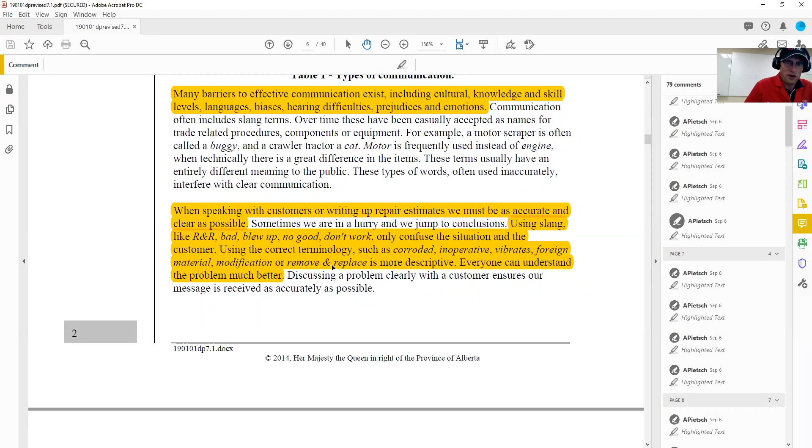When we're communicating, you have to know your audience. Now if you were going to go to a customer, I would probably say, well, I measured the brake drum and compared it to new specifications, and it's worn beyond service, rather than saying it don't work, okay? Slang over using the correct terminology is much more professional. But yet again, know your audience too. If you're on a good relationship with your service manager and you're just talking about this trailer that blew up, that's fine, okay?

This is a good example here. You don't want to be doing this in front of customers, okay? It just shows unprofessionalism, and they might regret bringing their unit to you, okay?

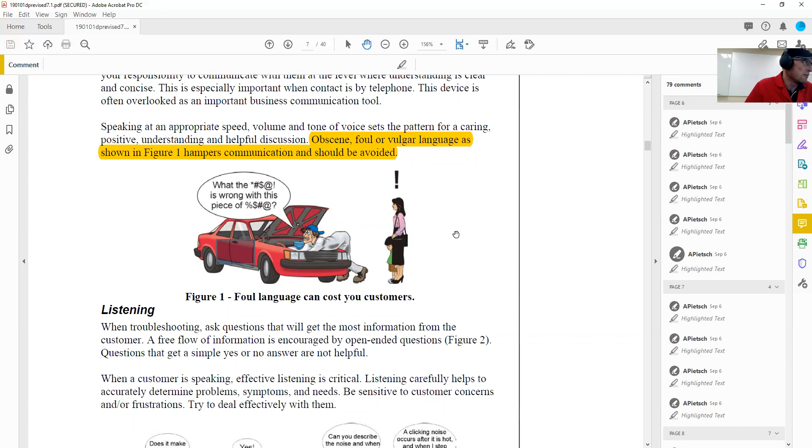Another thing that I've seen in private shops, there's going to be a name on the door here, you know, whatever the transportation, blah-de-blah transportation company. Well, if you're this technician here and you're saying, man, this company always has the biggest junk and I hate working on it, it's a piece of crap, then the driver's right here, it's probably going to get back to his company. And who knows, maybe this company has 2 units, not the end of the world, but maybe you had a contract with this company to service all 1,000 of their power units and 1,000 of their trailers. And now this gets back to the service manager over at the other place. Well, you know what, we used to like them, but not if they're going to treat us like that. So we're going to send our equipment somewhere else. Okay.

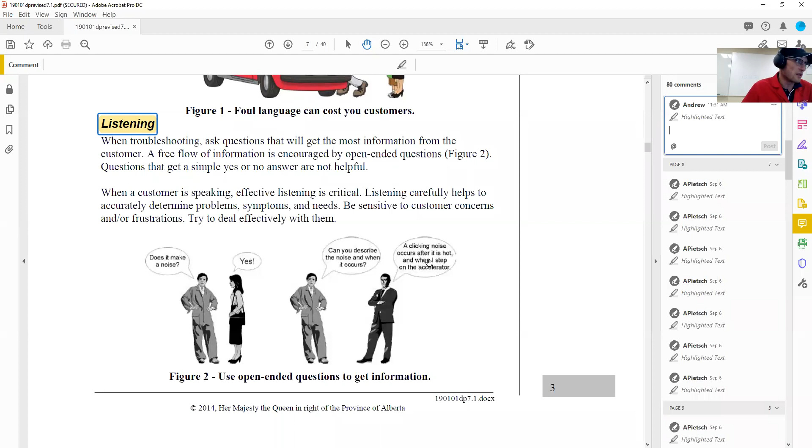Does it make a noise? Yeah. Can you describe what it is? A clicking noise that occurs after it's hot and when I step on the accelerator. All right, where does the clicking noise happen? There's lots of other things, so really pay attention and listen for those answers, okay?

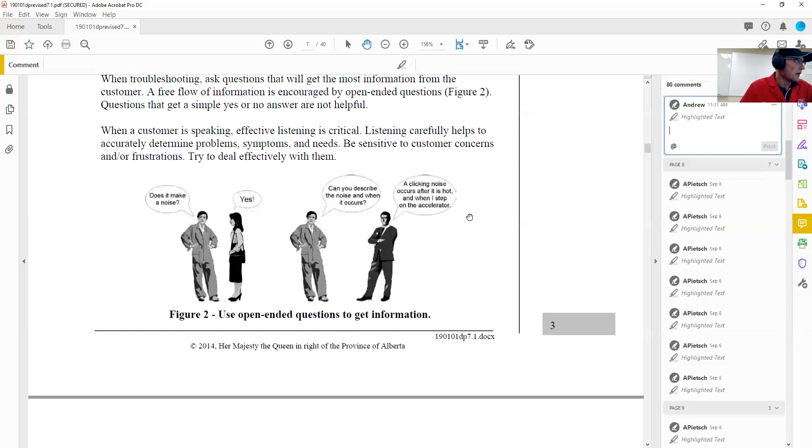Sometimes, in a situation like this, you could have your customer saying, hey, you know what? They could be telling you in not so many words, hey, when I really overload the heck out of this thing, it starts to break. And then that's the point where you can say, maybe you shouldn't operate it like that because that's beyond its specifications, okay?

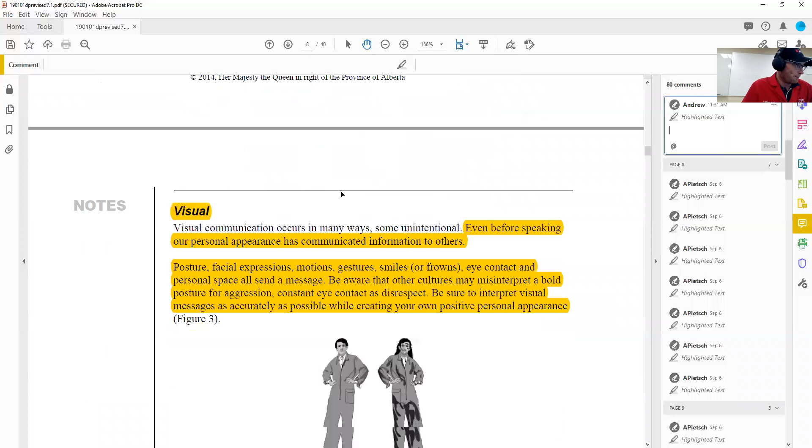Visual. As much as it seems difficult, you want to be a clean technician looking professional rather than this one. Now for our trade, sometimes it's okay, and I want to say that nowadays biases are going away because of visual, how you look visually, but it still does play a factor.

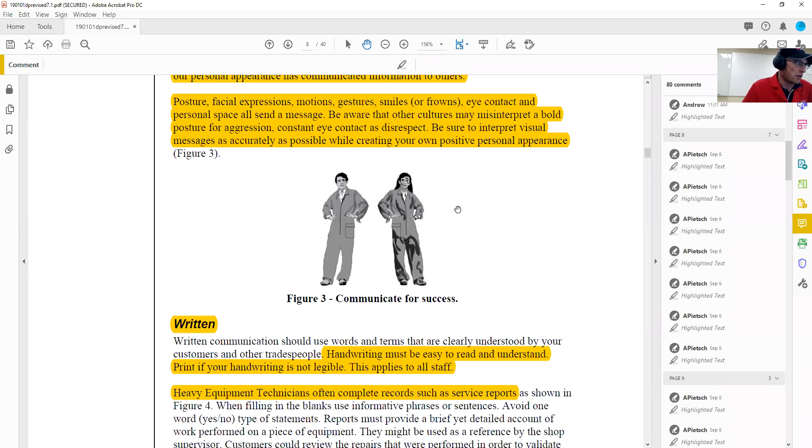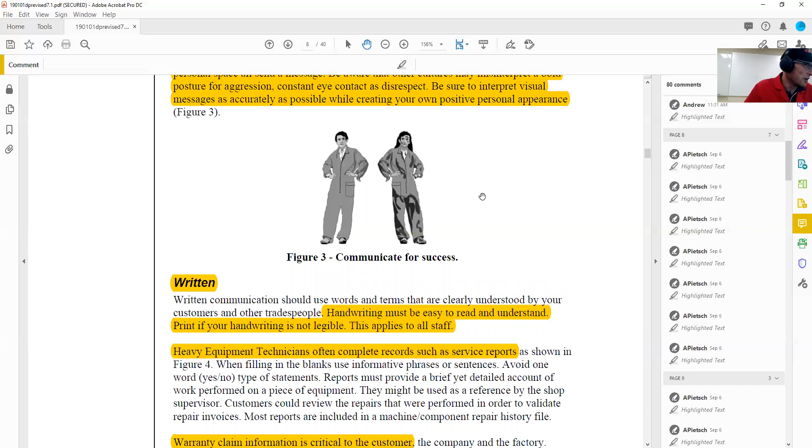And that's talking about things like dirty coveralls, dirty clothes, smelling bad, your hair hasn't been, like, sure, have long hair, but at least maybe brush it, put it in a ponytail. If you have long hair like this, I don't know why you'd want it like that. If any of you have had long hair and got it caught in a creeper wheel, you'd much rather have a haircut like that, or keep your hair up under your hat like I would do, because it sucks to get it caught in things.

Written is very, very important. Must be easy to read and understand. Print if your handwriting isn't legible.

We need to complete records such as service reports and warranty claim information. They're both very crucial. One thing all of you are going to start getting involved in, or most of you probably, is CVIPs. That work order that you're filling out a story on for a CVIP could end up being read into evidence in a court.

So you don't want to have that time where you wrote on that service report that his stuff was real messed up and it was all broke so I changed it. You're going to want to write on there that brakes were worn beyond the specifications to this number, replaced with new. Brakes weren't functional because of this problem, repaired, brakes function correctly.

You don't want to have to sit in a witness box and try to justify why, I don't know, you drew a bunch of doodles of happy face stick men on the service report. That would not be a fun thing to do.

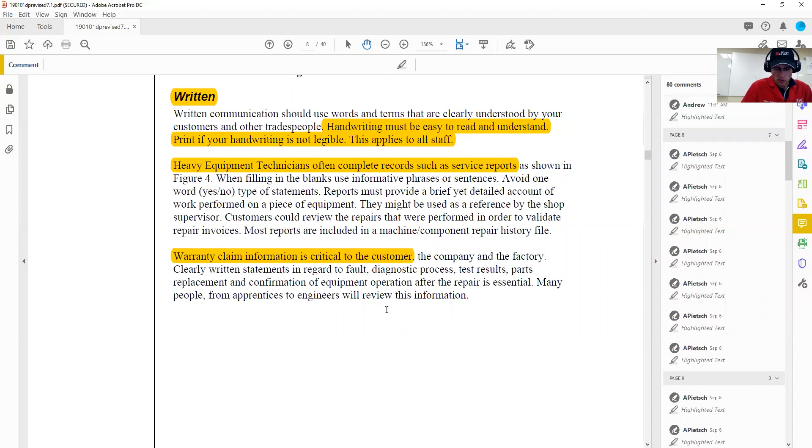The other thing is when it comes to warranty claim information, there's lots of money on the line when it comes to warranty, and you personally could cause the warranty to be rejected because of how you keep track of all the information. So your written language can determine that.

Picture of a service report. Some of you may have seen things like this, a complaint section or a guideline on questions to ask operators about how things are happening, or this might be something the service writer would ask before you ever see the unit. And then when your work order comes in, this is all going to be on it, so you have a little more information.

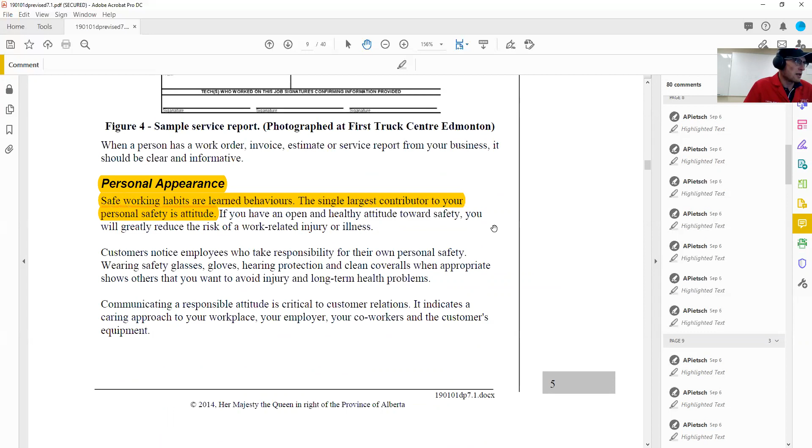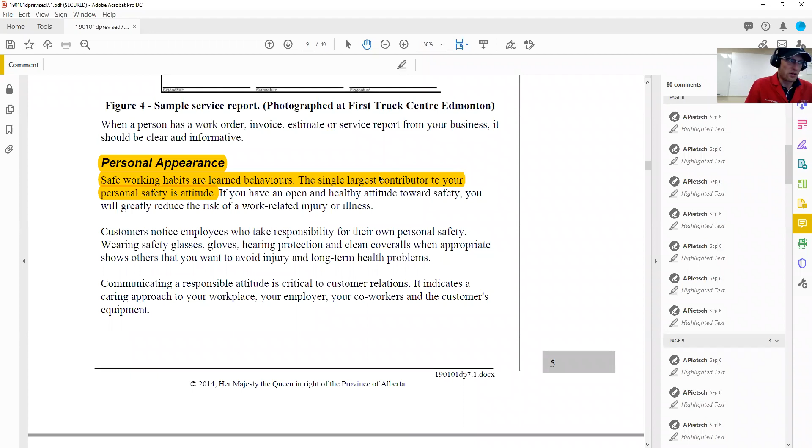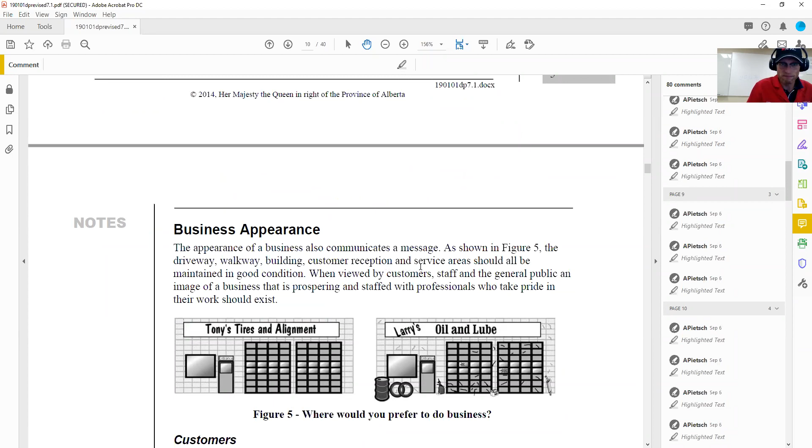So it says personal appearance, but that's not what I want to talk about. I want to talk about safe working habits are learned behaviors. Remember I said you're your own biggest advocate, so your attitude is the biggest contributor to safety. If you feel like, I don't have to do that, screw it, that's not a good attitude. Your attitude has to be, to keep everybody safe all the time, I need to wear my safety glasses all the time, so I wear them all the time. That's a good attitude to have.

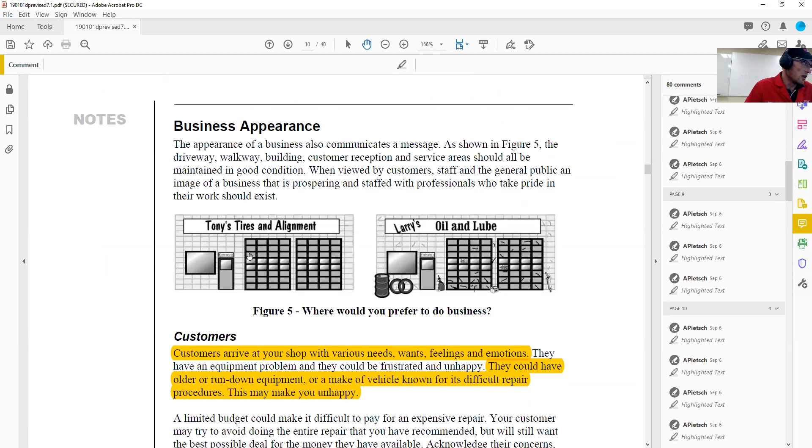Business appearance is another thing. You would probably want to go to Tony's over Larry's, just because Tony's place looks a lot nicer. They've got it cleaned up and taken care of.

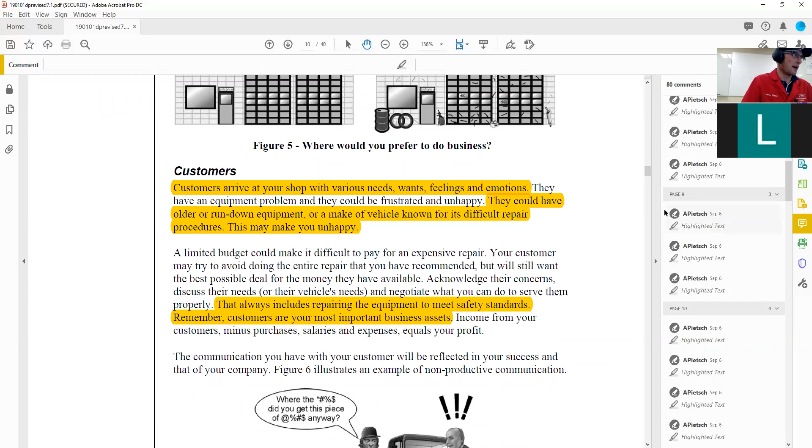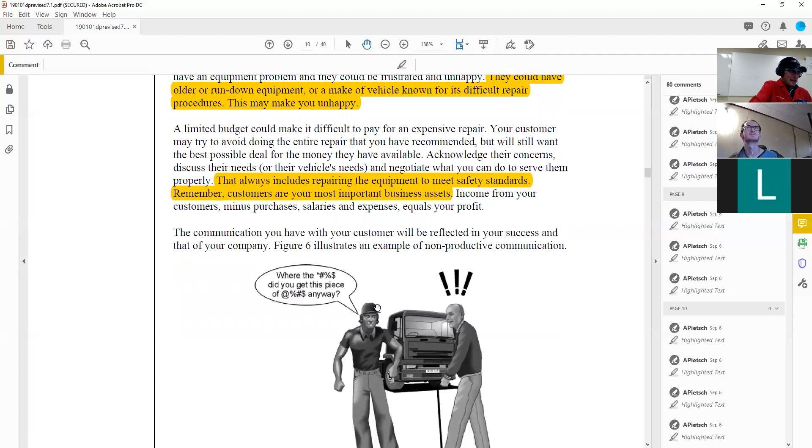So the customers, just because they have old stuff doesn't mean you should put them down. Like I said, where'd you get this piece of crap anyway? Who cares? He's your customer, he's paying your bills, okay.

It just means more work for you. Oh, it does, but I mean, you get paid by the hour. Typically.

And that's where good communication comes in. Hey, Mr. Customer, this unit hasn't been maintained in a long time. If it needs a lot of work done, our estimate's going to be pretty high. So it's a work between you, the service writer, and the customer. I mean, yeah, there might be a lot of work, it might be a pain in the butt, but it's the name of the game if you're a mechanic. Right? Being a technician is a certain kind of work.

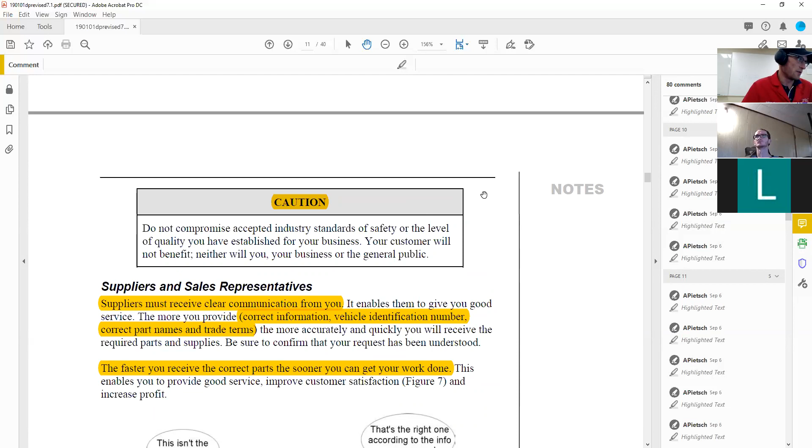And like I said, most of us get paid by the hour. I haven't met anyone piece rate out there, have you? Like you get paid by the job, a certain amount? Isn't that like a dealership thing? Even heavy duty dealerships don't do that, they pay people by the hour. But car dealerships, if anyone was an automotive mechanic, that would be like that. Lots of places do that.

So what that means is, according to the book - and there is book time on heavy equipment, that's how they bill or make estimates, based on these book times. For instance, let's say it takes an hour to change brakes on a Honda. Well, Honda is going to give you a job, you're doing brakes for your first job, we're going to pay you an hour - whether it takes you 5 hours or half an hour, that's how they pay. As far as I've seen, I haven't met anyone in heavy duty who's getting paid like that. For us in heavy duty, it would be, we're going to do brakes, brakes generally take an hour, here is your estimate for an hour.

Our technician also found that your unit is especially worn and hasn't been maintained properly, so we're going to add extra time for each rusted lug nut. There is a book time, an additional 10 minutes for each rusted lug nut, or 5 minutes, so you add that time on. There's additional time for a drum that's seized onto the hub that you would add on as well. So that's how they bill for the time that you used. Okay, does that sort of make sense?

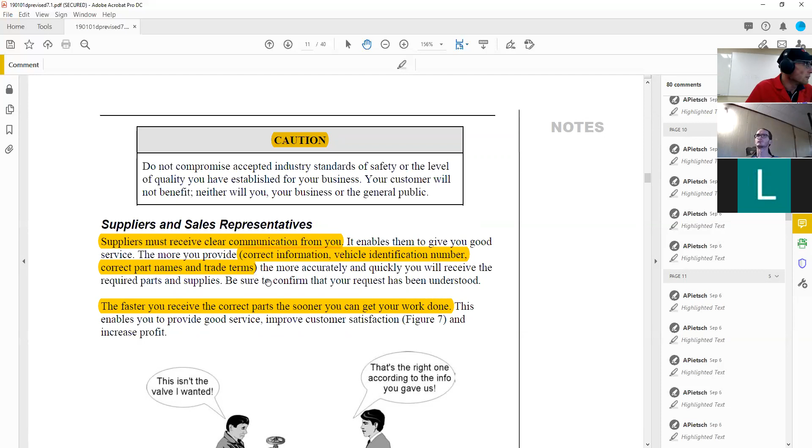Now, suppliers' representatives - who has ever gone to the parts counter and got the wrong thing? Once? Or lots? All the time. The blame can be shared 50-50 in my case. I agree, sometimes it isn't necessarily just their fault - it's your fault, sometimes it's their fault, sometimes it's no one's fault. It can be a bit of a process. Good communication is probably the best way to try and eliminate that, but still, even with the best communication in the world, you could end up with the wrong parts.

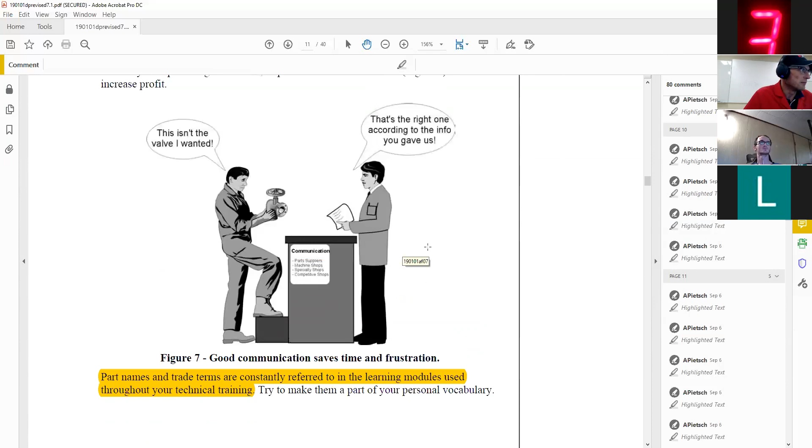This is how part names and trade terms are very good to use. If you go and ask this guy - I'm trying to think of something, I can't even think of a part right now that has a couple of good different names to it. So, as a tradesperson, you should hold yourself to specific standards.

We are all going to be journeymen. We want to be not looked at as the bottom of the barrel deplorables or just blue collar workers. We want to be treated with respect and professionally.

Every time you drive down the road, take a look at those tractor trailers out there with the blue stickers on them. Somebody like you or I is making sure that those are safe. We want them to be professional, clean, have a good understanding of what they're doing, be honest, not cutting corners.

Something else to do to be professional, don't badmouth businesses. Never, even if they're your competitor. You don't want to be the business that has to put everybody else down.

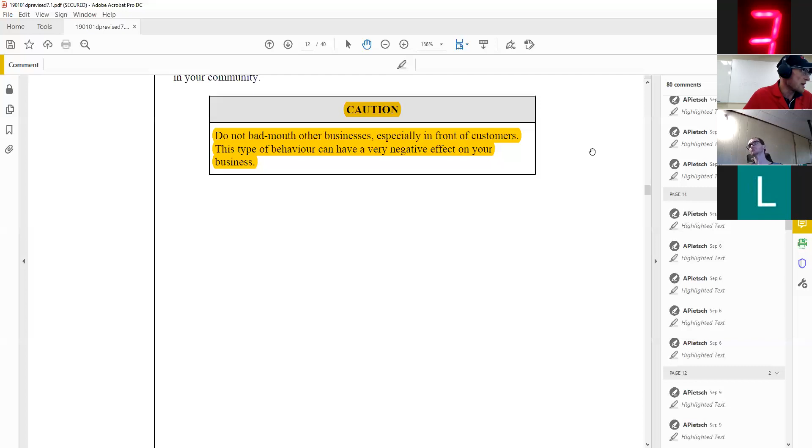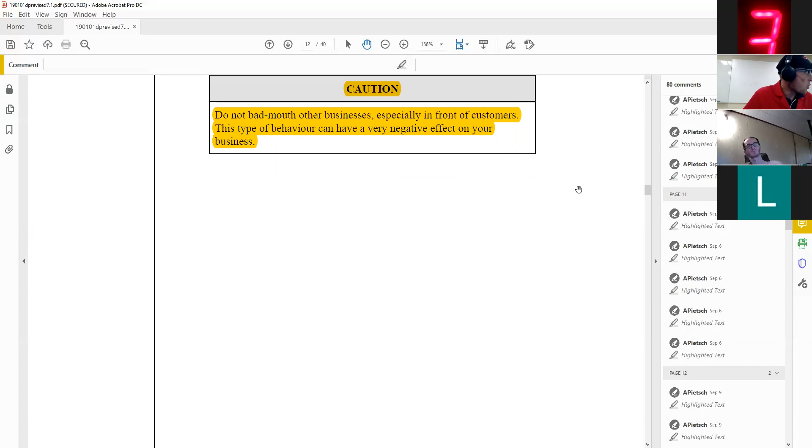Quite the opposite. When I worked in the city at the trailer dealership, we actually worked quite closely with the people that you would say would be our competitors. My shop did good fabbing and rig ups, so we would have competitor dealerships sending us units to get rig ups done. And if there was something we felt they could perform better than we did, we would farm that out too. So work together, not against each other.

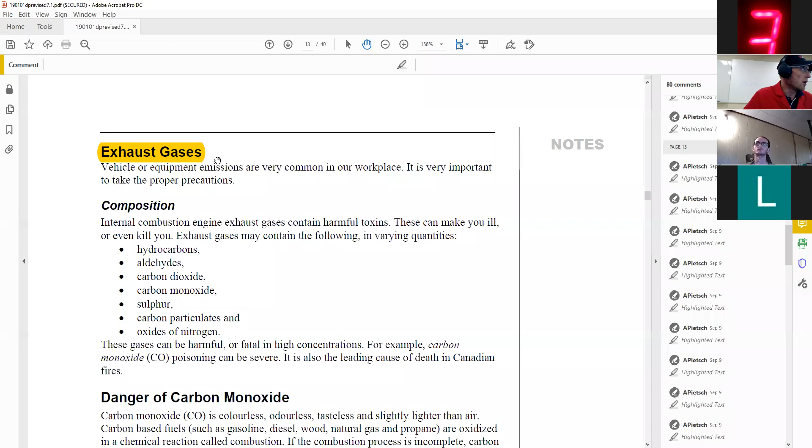Exhaust gases. The most common one you're going to see is from vehicle or equipment emissions. Carbon monoxide, that's what comes in vehicle emissions. That's the most dangerous. What you really have to worry about is if you're running gasoline units, it has a lot of carbon monoxide. CO isn't going to be such a concern when it comes to diesel. What is going to be a concern with diesel is soot - that's carbon buildup, not carbon monoxide, but carbon itself.

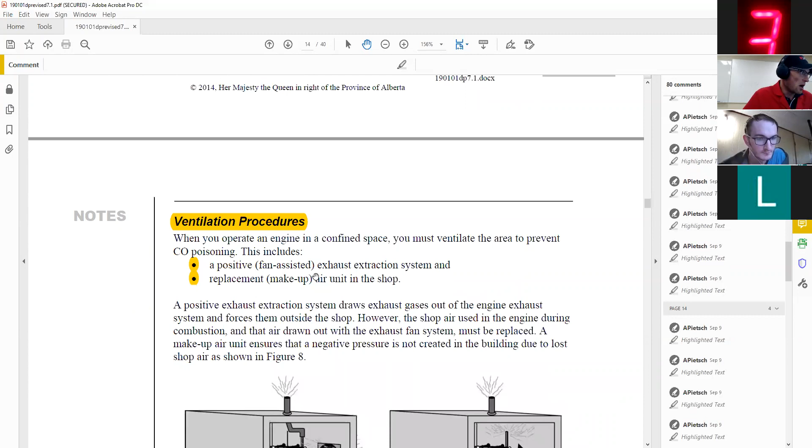For ventilation, positive ventilation means the air is extracted by a fan and has makeup air - air is being pushed back into it. There's a couple different ways that is attained. You have this one hooked directly up to the exhaust, here it's sucking air in. Or combustion uses shop air and it's just venting out of the roof - not ventilated - so there's nothing in here that is replacing the air.

Has anyone ever seen this negative air pressure in the shop? So you open the door and air comes into the shop. You don't want that. If anything, you'd want a positive air pressure in the shop, so as you're opening the door or running a unit, air wants to leave the shop.

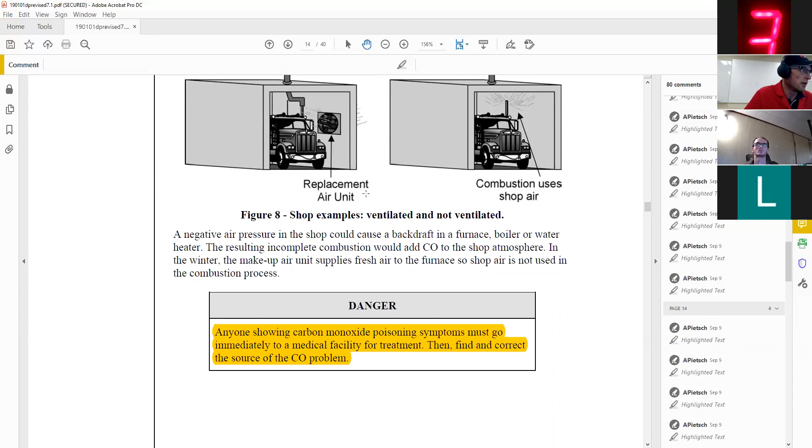Carbon monoxide - bad, very poisonous. The effects are cumulative, so if you get exposed to a little bit of carbon monoxide every day, eventually you're going to get carbon monoxide poisoning. Just sort of like lead.

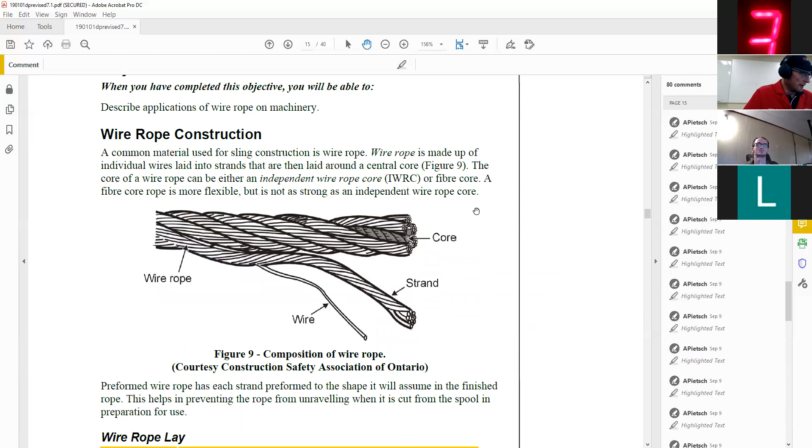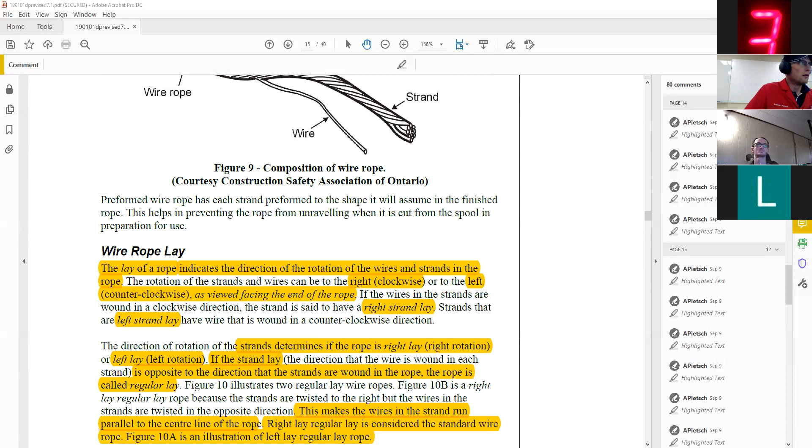How is wire rope constructed? You know what, I want to go over here. Can everyone see the instructor copy now? Okay good, this is the one I want to look at.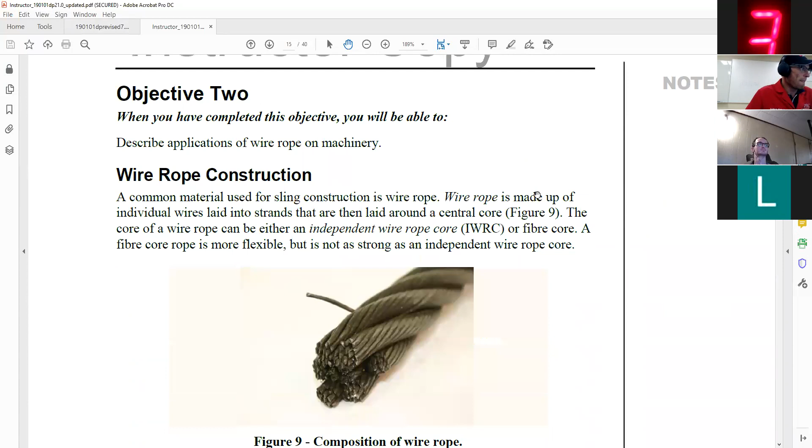Wire rope lay in construction. So for those of you who deal with wire rope - a little bit? Have you ever been asked about this - a left regular lay rope, a right lay regular lay rope? This has to do with the way the rope is built.

A regular, left lay rope - where's the picture here? That's right in the end. Because they don't talk about it as much anymore, let me explain how wire rope is constructed. Essentially what they're talking about is the way these wires and strands are wrapped around. A wire in the wire rope is one individual wire, like this - this is one wire of a wire rope. A strand is all of these wires bundled together. And then those all bundled together around a core are what make the rope.

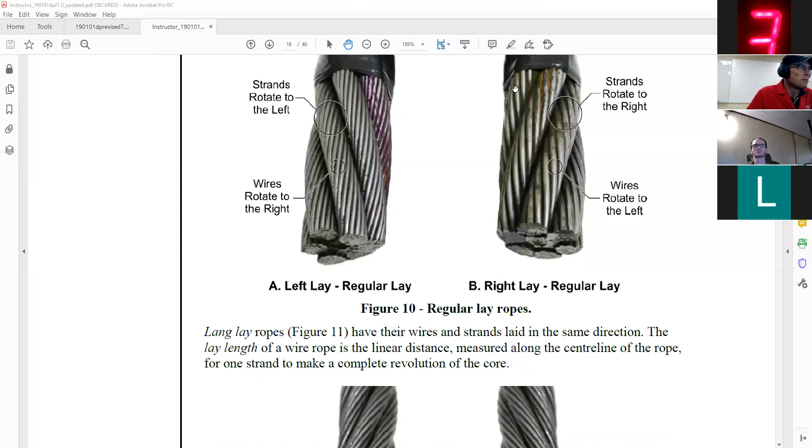Okay, a lang lay, you can see it doesn't go straight up and down. You can see how they come across. They're not straight with the center line of the rope.

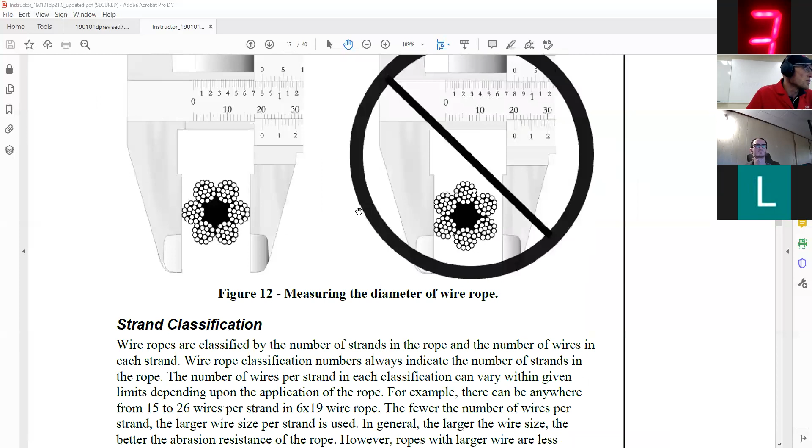Different classifications. If you need to worry about ordering wire rope, dig into this more. But other than that, it's not the end of the world, okay?

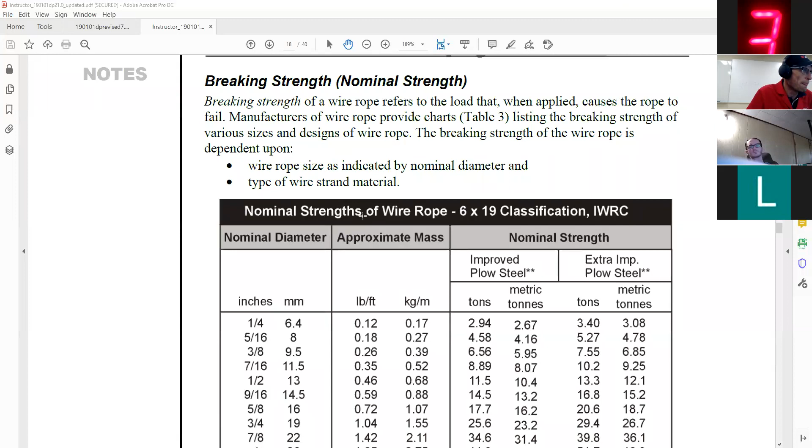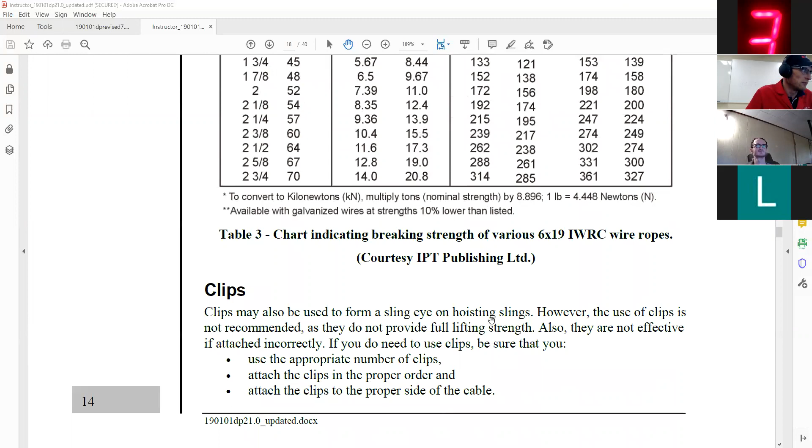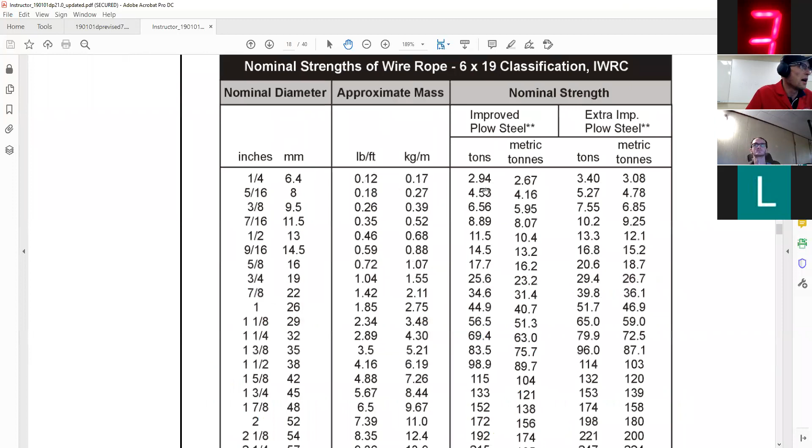And then just different nominal strengths. I mean, anyone who says they have all this stuff memorized is lying to you. If you need to know this, you're going to need to look it up. Same company, IPT Publishing, so this is going to be in one of those little handbooks. This is actually probably out of the rigging handbook, wire rope classification.

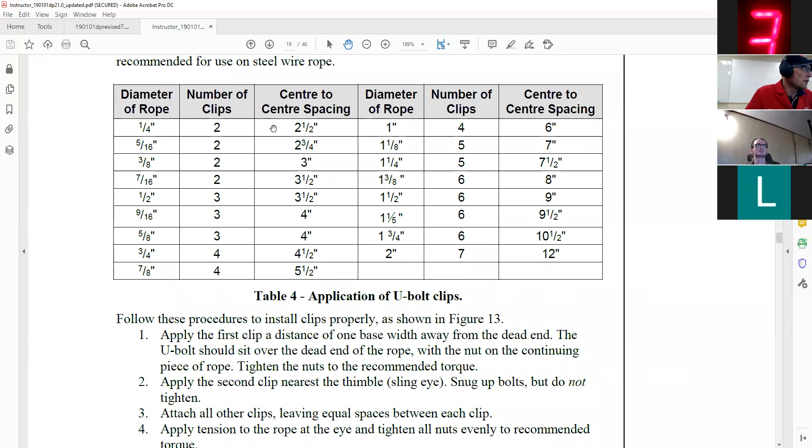Clips, when it comes to wire rope clips, the number of clips, yes, very important. So those of you using wire rope to hold tarps down, you probably use these type of clips. The one important thing...

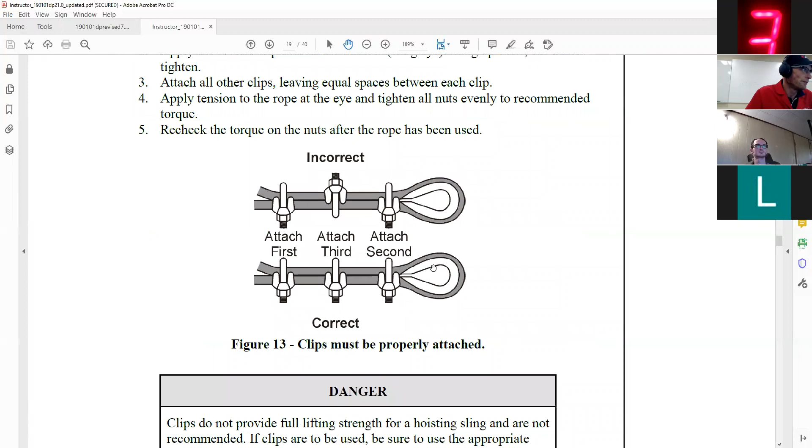Never ever do what? Anyone remember what it's called? Stagger, I guess. Don't saddle a dead horse. There you go. Don't saddle a dead horse.

So this way is an incorrect way because the saddle is on the dead line here. The dead line is going to be the one that isn't pulled on. So I'll finish the picture here. They don't have it.

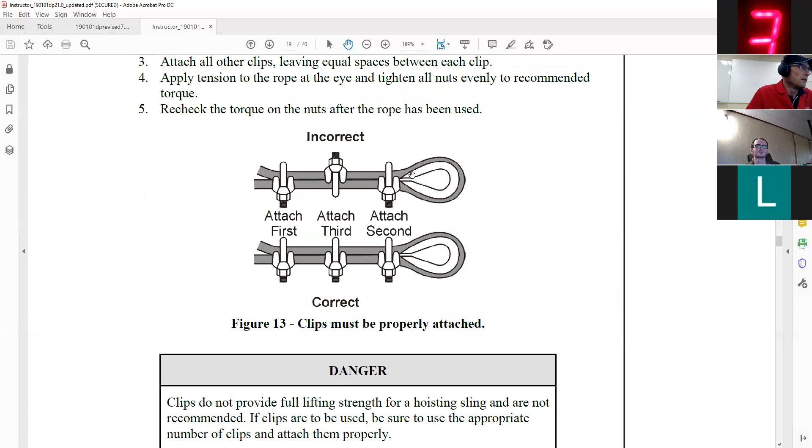So this picture is a little bit incomplete. This side here is going to go to our winch, so that's on the winch there being spooled up. This side is dead, as in it's not attached to anything. There's the end of the rope right there, so that's the end.

This piece of the clip is called the saddle, and you never saddle the dead line. So that's the part of the loop that isn't getting pulled on right here. And the saying is you never saddle a dead horse.

So these ones are incorrect because this one is put upside down. They should all be attached the same way, with the saddle portion of the clip being on the live side of the wire. Okay, make sense? Yes, sir. Perfect.

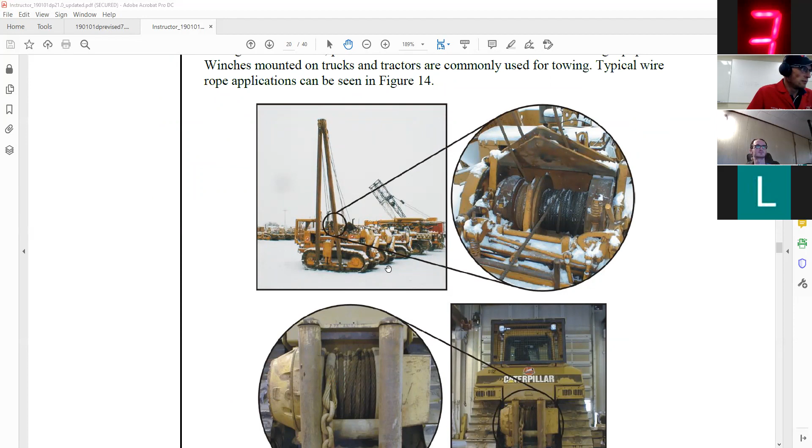Where are you going to see a wire rope? Chances are some of you have seen things like this. Does anyone know what machine is this thing? Side boom. Sure, that sounds like an interesting name.

So this on a winch, this is where I've seen them mostly, okay? Winch. Wherever you see them wound up on a drum, that's where they'll be.

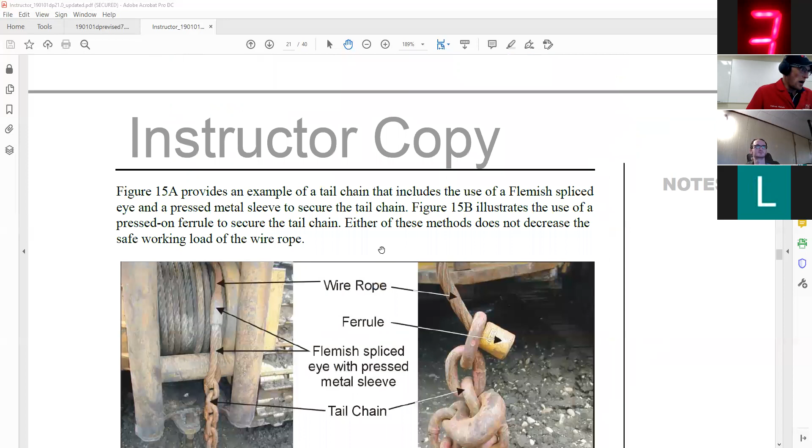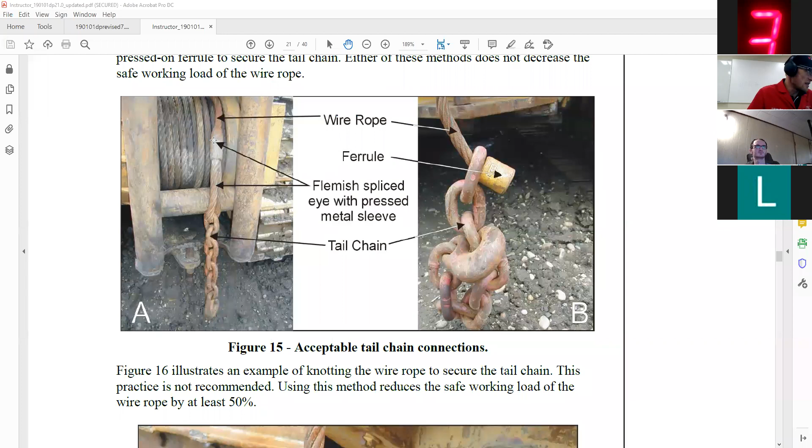Different ways of ending the wire rope, okay? So you could have a Flemish splice, what they call it, and then a pressed on sleeve. This will be like the slings that are pre-manufactured, or you can have a ferrule pressed onto the end there too. Sometimes they even knot them. A knot will reduce the rope's strength by 50%, okay?

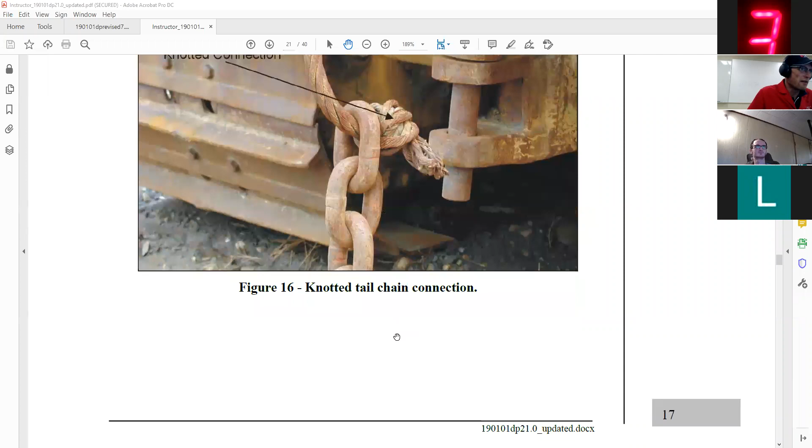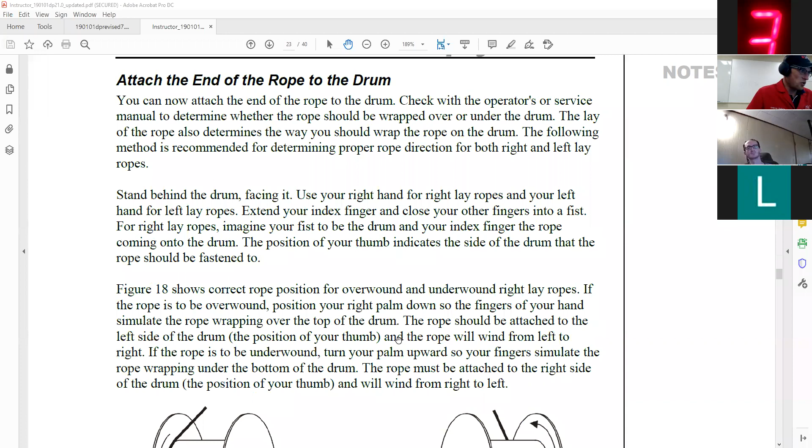Unwinding wire cable, if you've ever done it, it's interesting. Replacing winch cable or cable for a crane or something, got to make sure you're winding it the correct way and to the correct direction.

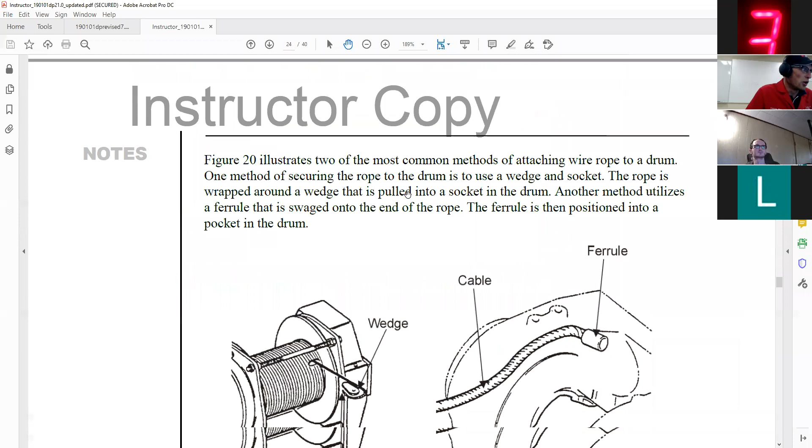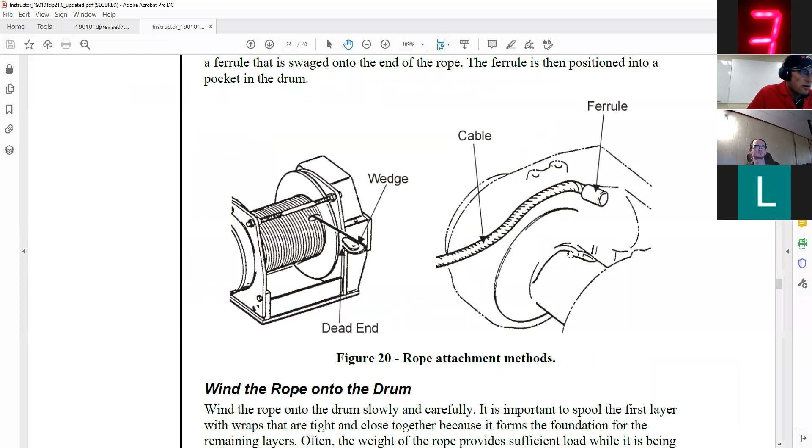A lot of times they show that this spool doesn't have anything on it, but a lot of times you're going to have grooves in it, and there's going to be a place where you can either wedge one end of the rope and there'll be grooves in here where it follows around, or for instance on this spool there's a place where the ferrule locks in, and then you can start spooling.

You see which way the rope goes and it's going to start coiling that direction. Okay, he's just using a soft hammer to pack the rope on there tightly as it's winding into place.

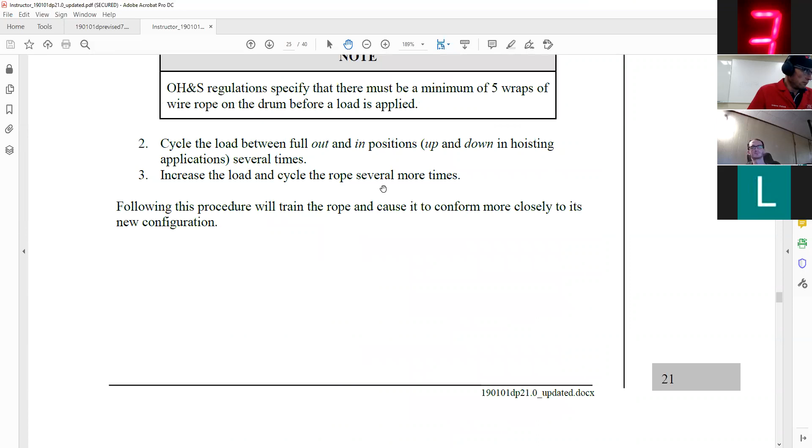Twists, kinks, spins like that. There's a break-in cycle for new wire ropes. That's something that I've never done. It's just a matter of, yet again, for someone who's working with cranes and stuff like that, you might have changed wire ropes. Lubricating them.

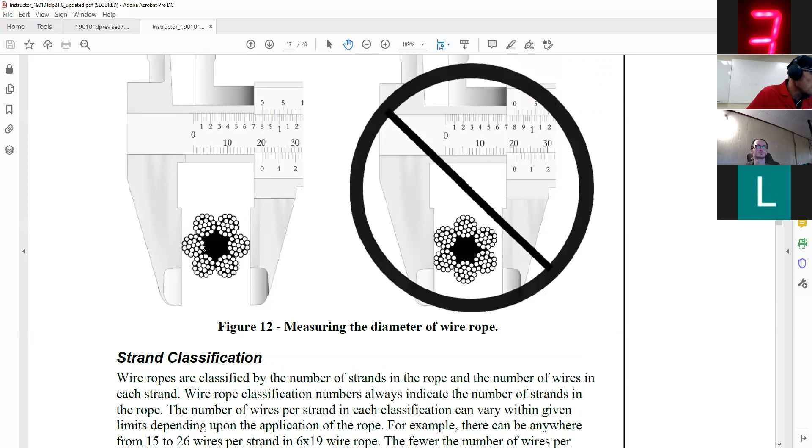You definitely want to lubricate all wire ropes inside of those strands and wires. They're all going to be moving and stretching, okay? So where's this picture here? What you're trying to do is lubricate all of these internal components. So as these strands are sliding and stretching against each other, they're not rubbing on each other. They're actually lubricated inside of there, okay?

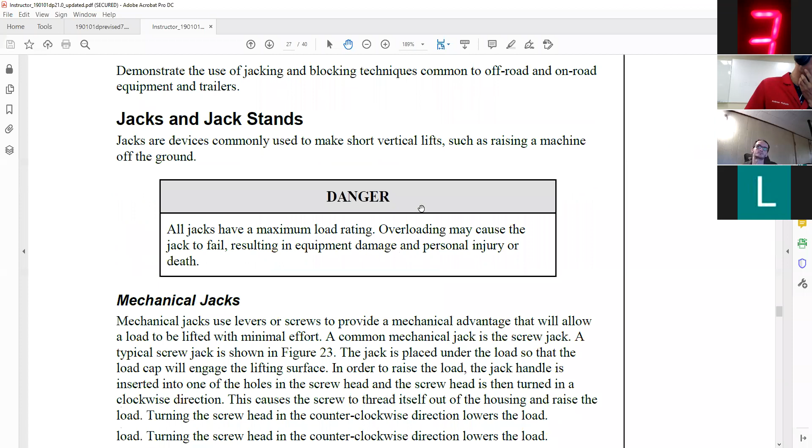All right, jacks and jack stands. The last thing, how do we lift things up? A jack is commonly used to make a short vertical lift.

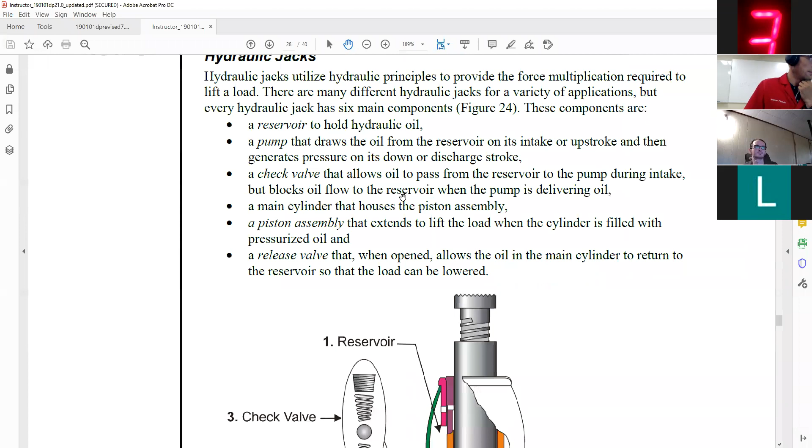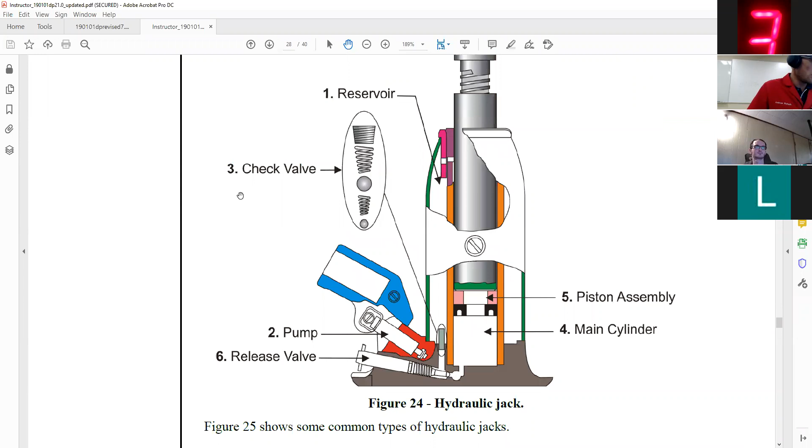Chances are hydraulic jacks are what everybody is using, so thanks to the valving inside and the mechanical advantage of the piston, you can use a small lever, a smaller piston to lift up a larger load.

And then when you need it for a transmission, it's worn out. And removing axles, yeah, that too, it worked great for a diff. Works good, yeah, if it's not worn out.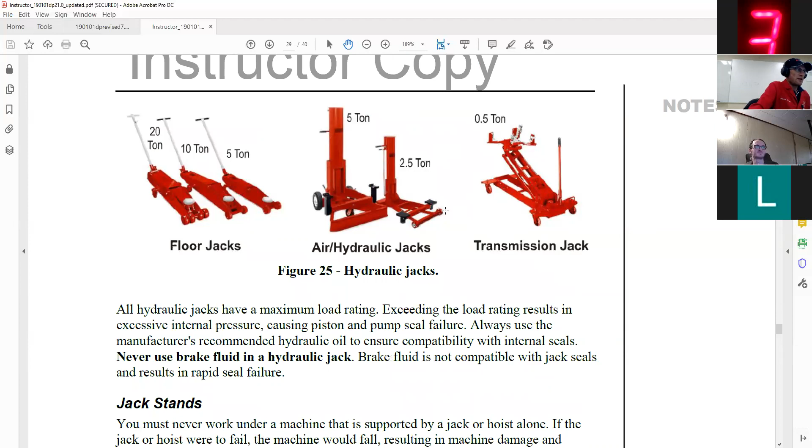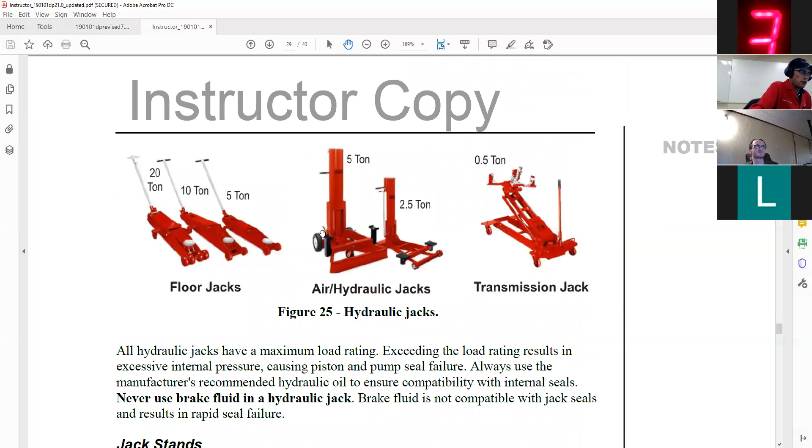So any of these devices I've just talked about, can you work underneath of them? No, never. All it's being held up on is fluid or air and fluid, or even in this case, probably the safest one, but I bet not many people have mechanical jacks like this at work. If you want to go underneath of a unit, you need to put it on stands or blocking.

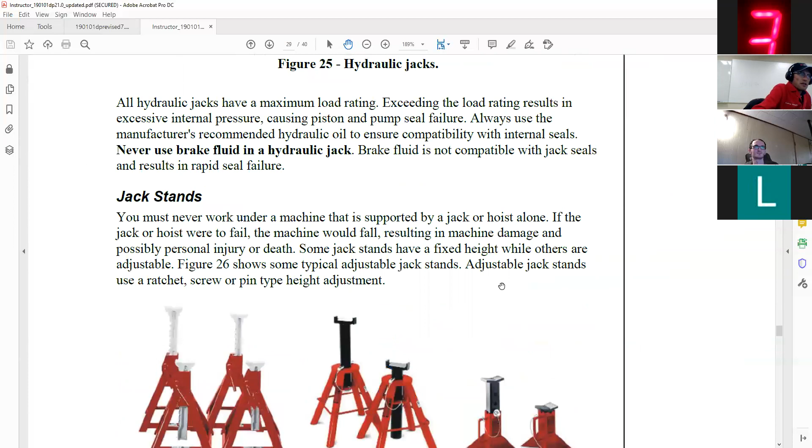Now, my big pet peeve about stands, and this happened this summer a lot too. Do you want to get your stands from Harbor Freight? Everybody hear about that? That was going on.

So there's a company called Harbor Freight. It's a lot like Princess Auto up here. They were selling jack stands and they were breaking. They would split in half along here and the jack stand would come apart. It was a big thing in the States. There were lots and lots of people who had jack stands breaking.

So they need to be engineered properly. They need to have a sticker on them telling you what their weight rating is. That sticker needs to be in place and legible.

The other thing about these, is it okay to use a bolt? Right here. Absolutely not. It definitely is not. Or even right here or here. A bolt is designed to have tensile force put on it, not a shear force.

These hardened pins are specifically designed to withstand the shearing effects of a force being pushed down on them like that, okay? If those pins are damaged or gone, you need to get new ones.

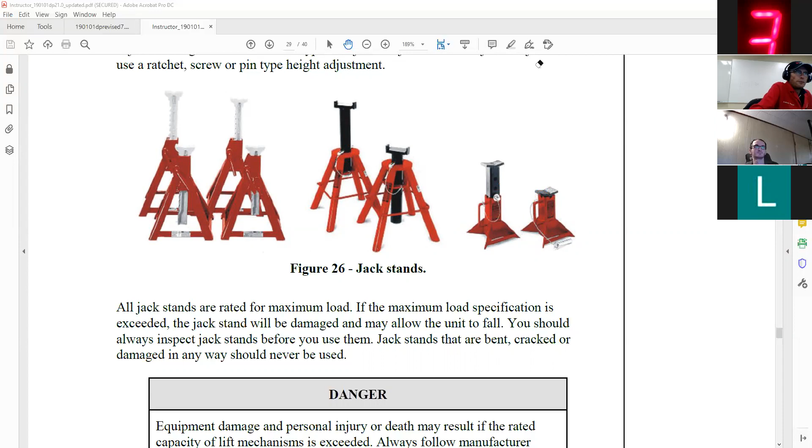We're not going to see it much in our industry or in our first year here, but you always, always, always have to block a box before you go under it.

All this big hydraulic ram is here is just a bottle jack, okay? You cannot go under it the same way you can't go under a jack. All right, you have to have some sort of solid blocking.

Now, who's putting pieces of wood down in this section right here? Is anybody doing that? You get a big 4x4 and you put it right down in here. Yeah, we used to do that in a shop I worked at. As a secondary, maybe.

Have you ever put the weight of the box down on that 4x4? Probably not, but haven't, and here's why.

Has anybody seen what old school nutcrackers look like? Just the handle, it's sort of got one big handle with a pivot point and another handle on it. And then they have teeth somewhere around here. And you put a walnut inside of there and you squeeze those two ends together and it cracks the walnut. Is everyone familiar with what I'm talking about?

Yep. Does this not sort of look like a big walnut cracker where you just put your 4x4 in right where the walnut should go?

It does, and it is. Yes.

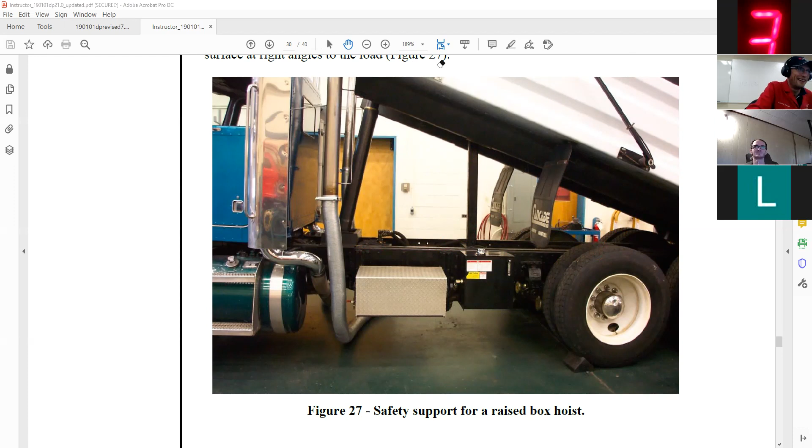Something that's engineered to actually hold the box up that isn't wood. You got to remember that tree is still mad at you for cutting it down - it'll kill you if it gets a chance.

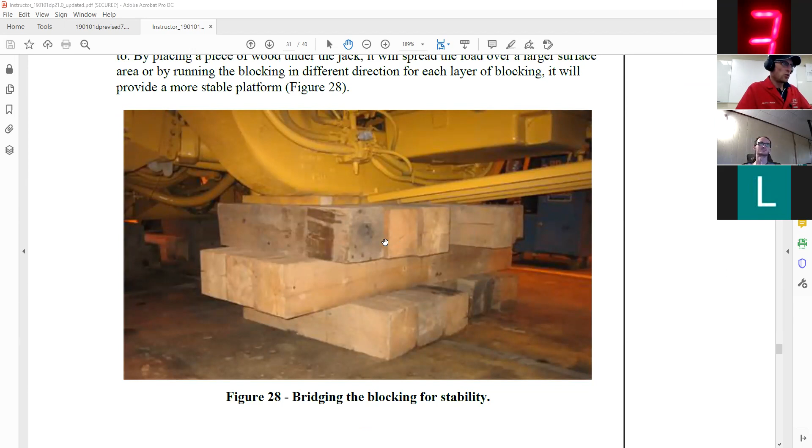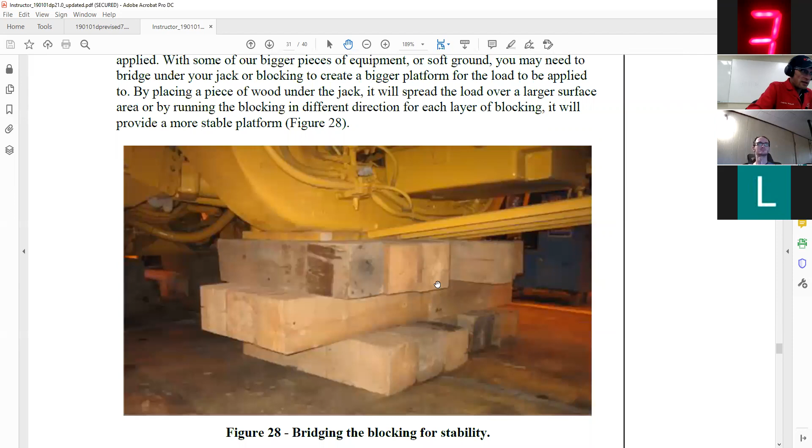Yes. Now the difference between having a piece of wood here and here is what I know the practice is. In this picture, the weight is all on the wood already and it's supported. With the box, what they're doing and what I've seen people do is the weight is still on the hydraulic ram.

They're just putting this in here, like somebody said, as a secondary for a feel good. You feel good that this is sitting here, right? Little do you know that if it actually failed and came down, this wouldn't do anything for you except make a noise, and you'd say, hey, what's that? And then you'd be dead. That's about how quick it'll happen.

So a bit different. It's the same thing, wood being used as blocking, but it's a bit of a different circumstance, okay? That wood can't take that shock crushing load.

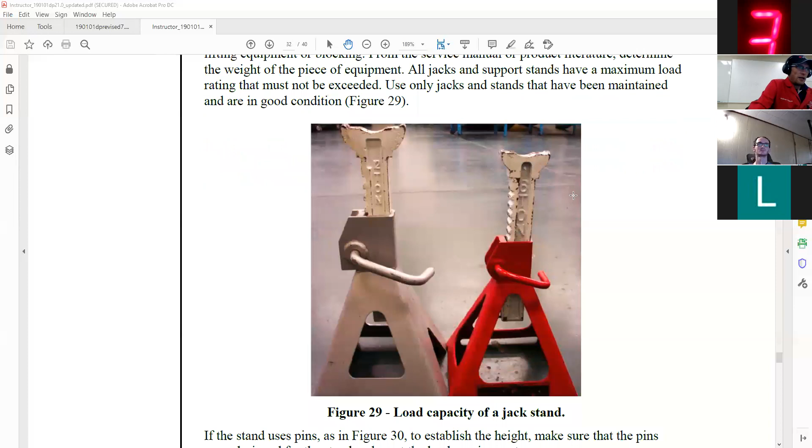You need to know what the weight rating is, okay? These ones are nice - they have 12 ton and 6 ton put right onto them. Very good. Make sure those pins are the correct ones.

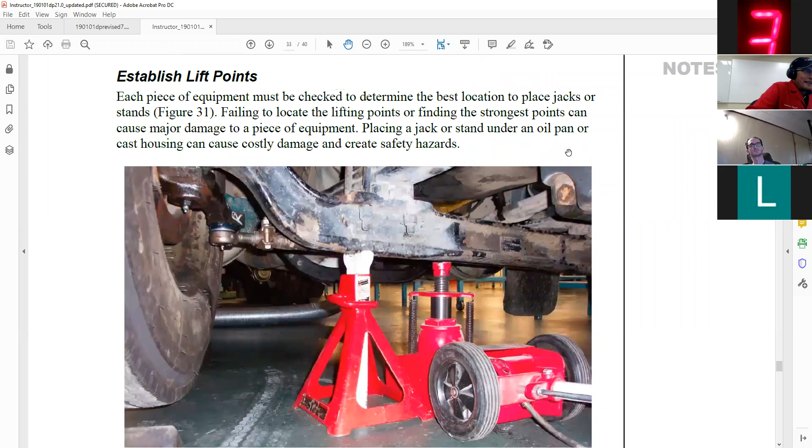Now, this picture can't show you very well, but I've seen lots of people who tried to lift up the front end of their tractor and end up with an oil spill because they're trying to lift from the oil pan. So make sure you're lifting at the proper lifting point, okay?

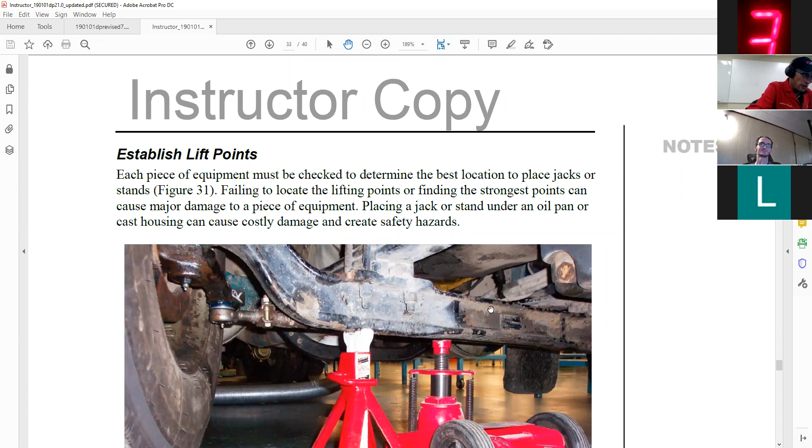Inspect your jacks, yeah. And also don't go too high up.

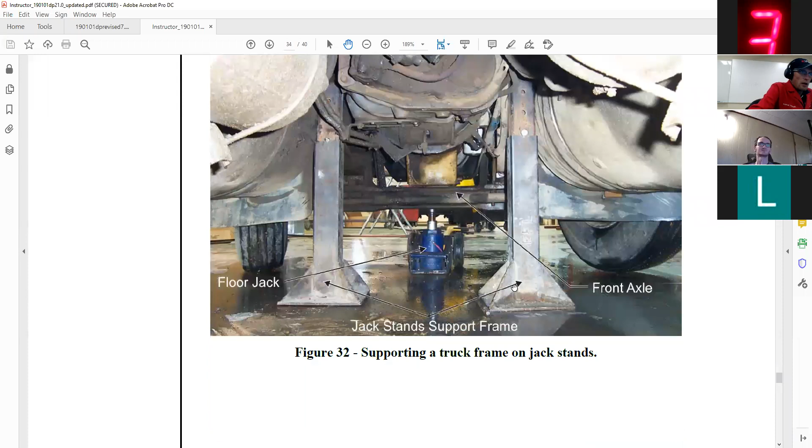I would never lift the wheel higher than it needed to shimmy off of a unit, okay? When you pick your unit up into the air, you should just be able to slide the wheel off of that hub. I've seen people lift as high up as their jack and jack stand will go, and I don't know why you'd want to lift your tire up onto that.

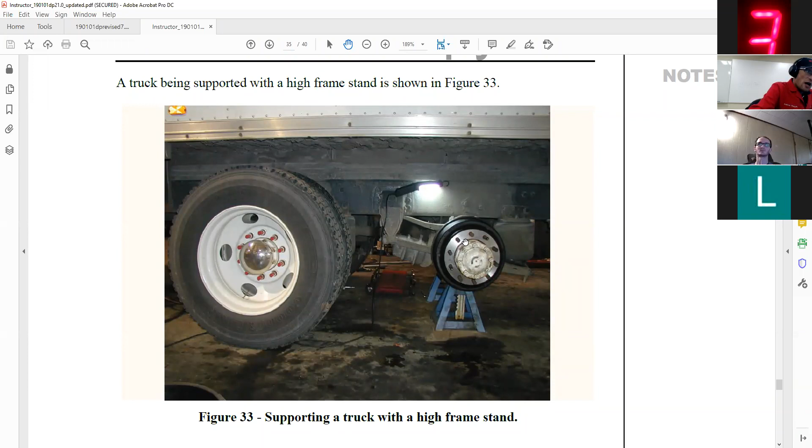That's just going to cause back pain, strain, extra work. Coming from a tire guy who's pulled off thousands of wheels - if it's more than an inch off the ground, your wheel will kink on the hub and it will make it twice as hard to pull that wheel off.

If it's just high enough, if you're at that perfect height where you can shimmy it right off and it just slides on the ground, that's perfect. It'll be so easy to get it on and off.

But yeah, I agree with you. A lot of the time you get that difficulty taking the wheels off these big hubs because it's trying to kink on there. It has so much flex that it can move back and forth.

The weight is off-centered on a dual, so the mounting face is way to the side of where the center of gravity is. So naturally the outside wheel wants to kink top out, and the inside wheel wants to kink top in. Yeah, exactly, they're very offset, not in the middle.

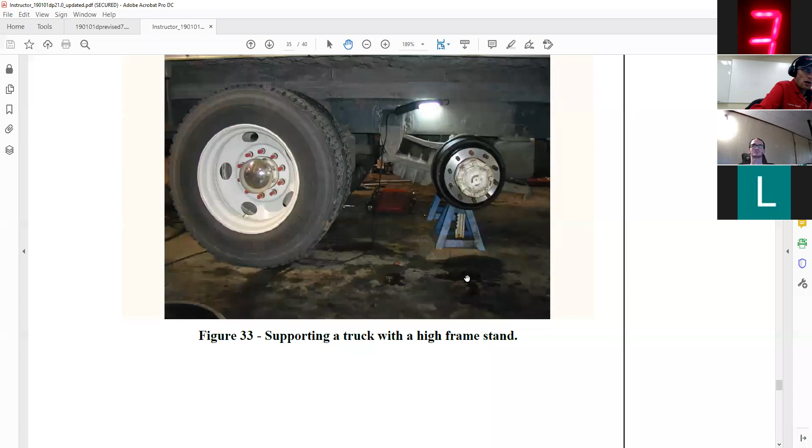So if you allow it, if you give it enough clearance at the bottom to do that, it will. And then you're just going to be fighting with it the whole time.

All right, so that's that. Anybody have questions? How's everybody feeling about all this so far?